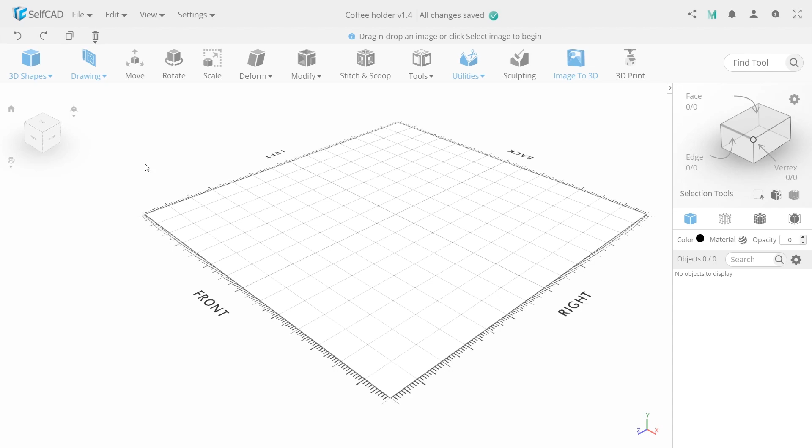Let's switch to top view and orthographic projection like this, so our workspace will look like a canvas that is perfect for drawing. Choose a freehand tool with a circle sketch to draw the round part of our future object. It will also need a hole for a cup.

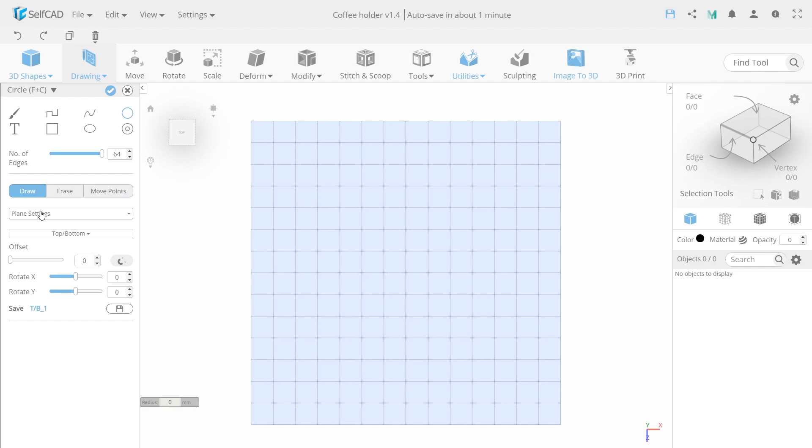Set 64 number of edges to make the object smoother. Also set a minimum step size in the precision settings so our cursor will be glued to the grid. Put a dot in the center, press tab button and set 45 to bottom radius value.

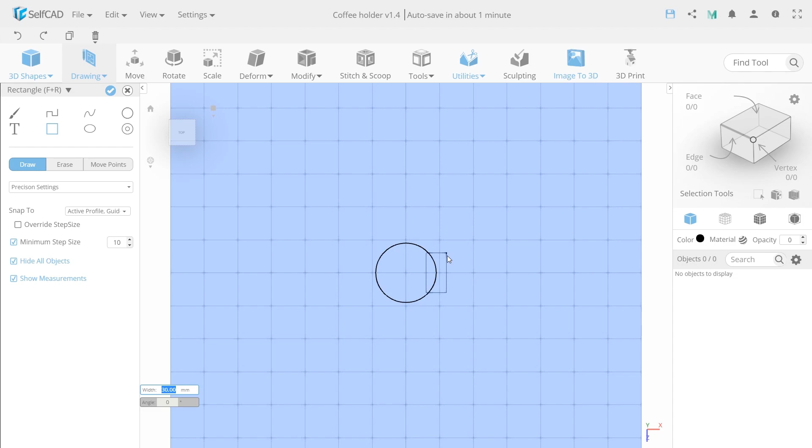Now choose a rectangular brush and put a dot here. Move on 60 down. Now move to the right and set 90 to width. Then I will put a dot here and here, setting 20.

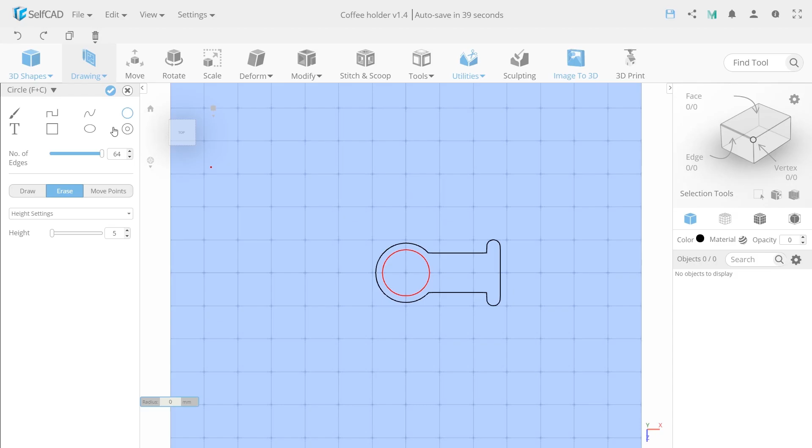I want it to look better, so I'm going to choose a circle brush again and draw two circles here. To create a hole, I will use an erase step that will delete everything we draw. So put the dot in the center and set 35 as a radius. Then set 5 in height settings. Turn back to perspective projection, and that's our result.

Next we need to make a plane in the bottom part. We have two parts, one with a hole and another one filled. So we will create a copy using the copy offsets tool. Now our first created object is unselected and we can hide it.

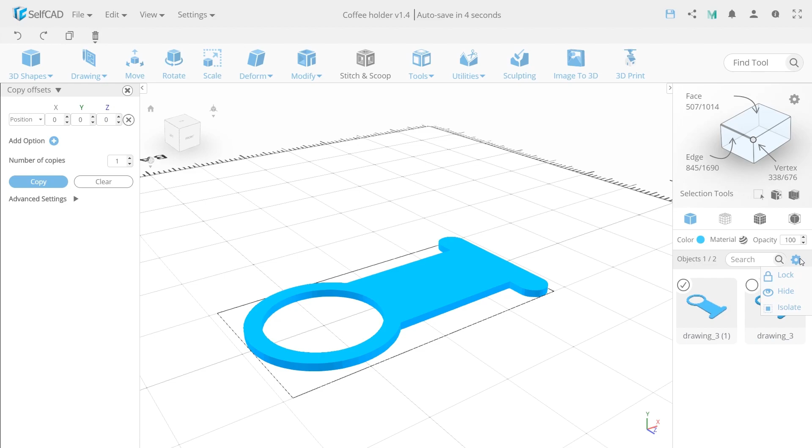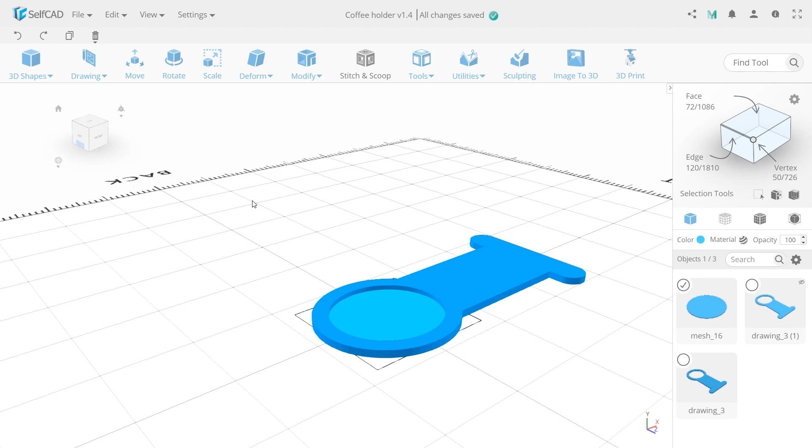To add a plane, choose a cylinder shape and switch off Hide All Objects settings. I will set both radiuses to 40 and height to 2. Now merge the cylindrical part and the bottom base to make one object.

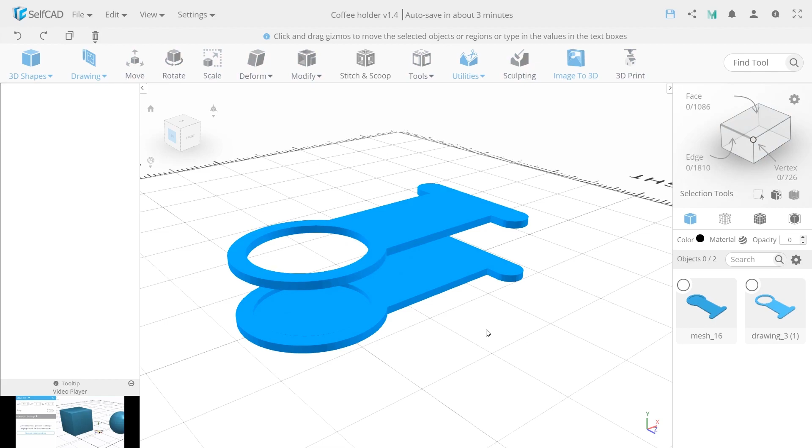Now I'm going to show our hidden object and unselect the second one. Choosing another one, I will move it on 39 on Y, and that's our result. One object is a little higher than another one, and next we will create a fastening.

It will hold the spring in our model. Change the top view and orthographic projection again, and with help of freehand tool I will create this shape. Quick apply.

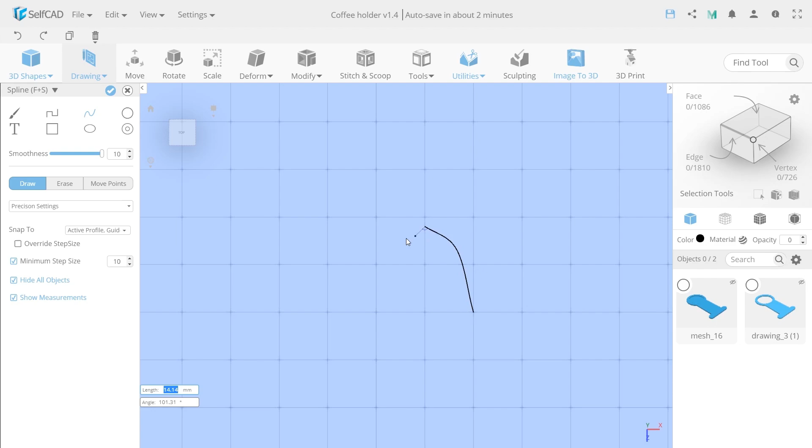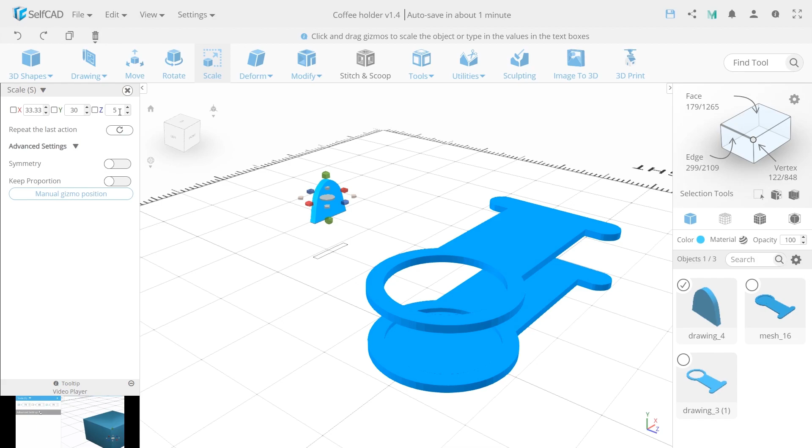Now turn back to perspective projection and rotate on -90 on X and scale with keep proportion option on. I will also reduce the height to 30 and switch off the keep proportion option. I will set 5 on Z and move it here.

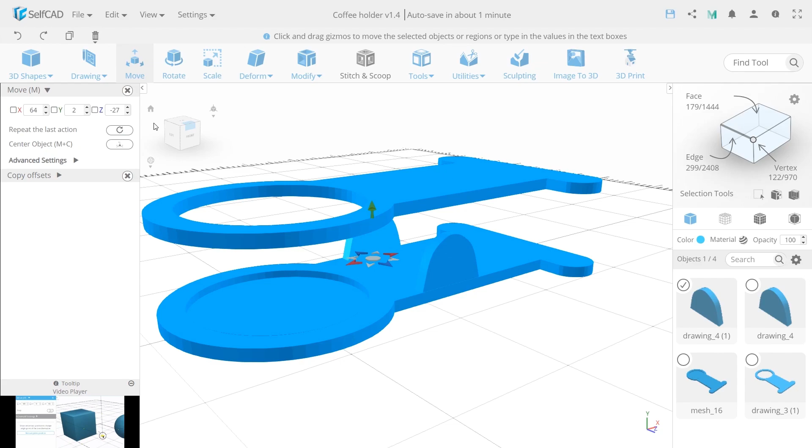Using scale, reach such a form. I will make a copy of it, and to place it on the opposite side, I will invert Z values, -27 in my case. Then I will copy both objects and rotate on 180 on X-axis. Then move it up. Now I will move each one 5 lower on Z.

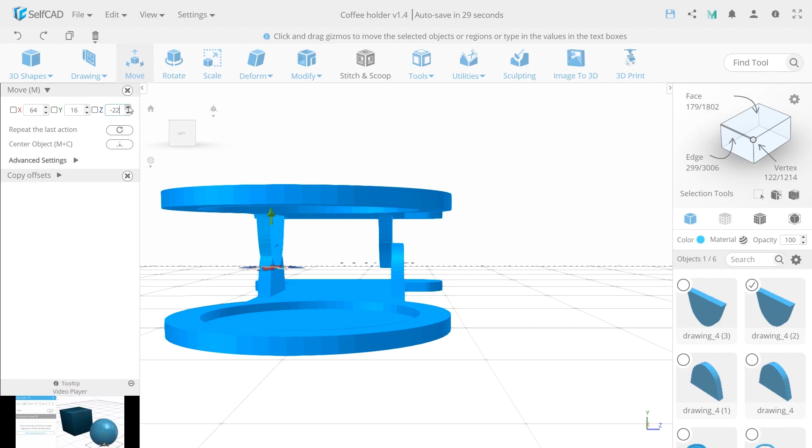We will also need to create holes where the stick will be placed. Make a cylinder shape with 2 as both radiuses and 66 as height. These measures are a little bit bigger than real ones.

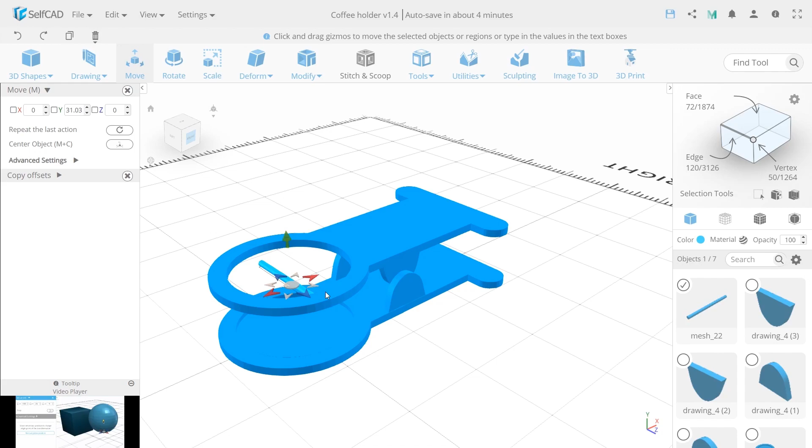Rotate on 90 on X and place here. Placement is important if we want a holder to move. As we have two similar parts, we need to make two copies of a stick. Because we can't make 4 holes using one stick, as it will be one object afterwards, so select the stick

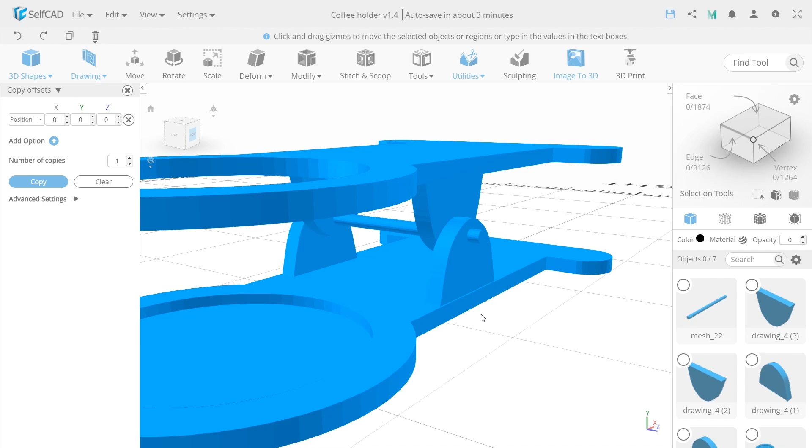and make a copy, then select the needed object. Use Stitch and Scoop with option difference. Let's take a look at our results so far to see how we are going.

Ctrl Z and select other objects, also apply difference. Perfect.

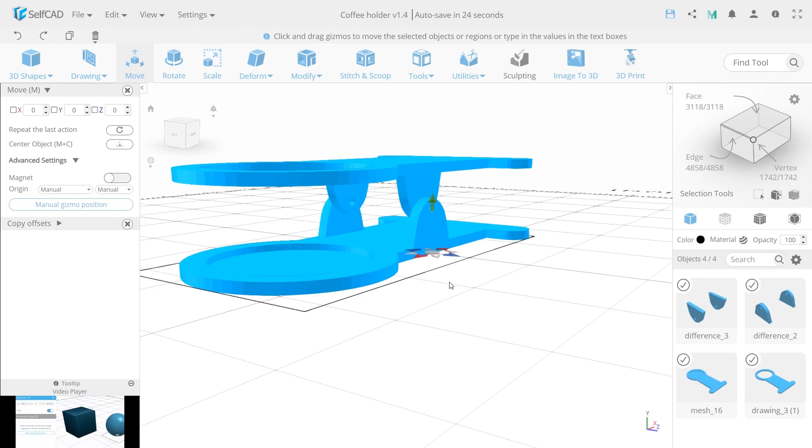Next, select all those parts and move them. To put everything in the right position, you can switch on manual gizmo position in advanced settings. Now put the gizmo here, so pivot is counting from here now. That means we can apply center object option and get this needed result.

Now, when you unselect the object, don't click on the center object because it will be counted from the new dot now. And now we can move to 0 coordinates on Z, like this.

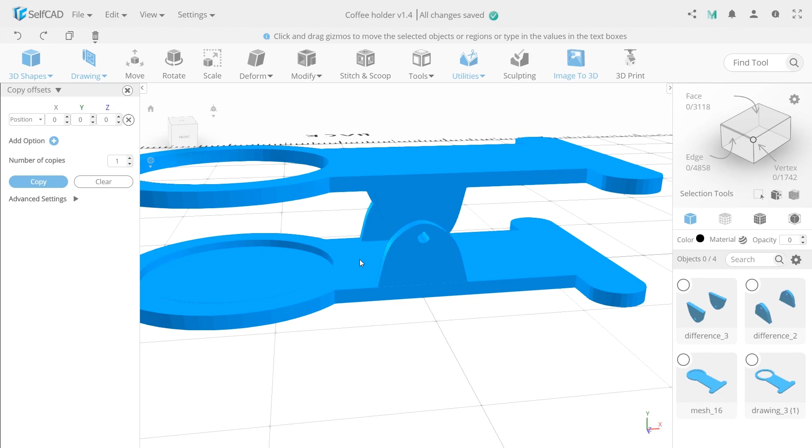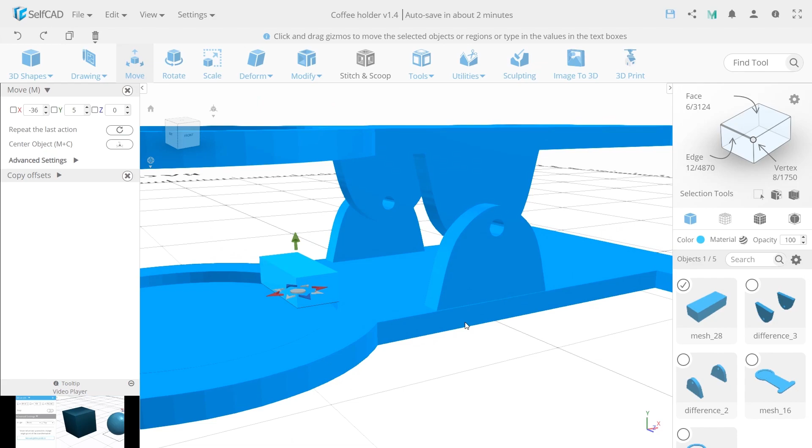Next, we need to create a fastening for this spring. For this, create a cube with height value 7, width 10 and depth 25. Move on 5 on Y and minus 36 on X, so our spring will hold here. This part shouldn't protrude on this hole, so we need to move it right here.

We need to create two such things so they can hold the spring. I will use a cube with 80 as depth, and I will move here and up and make a copy.

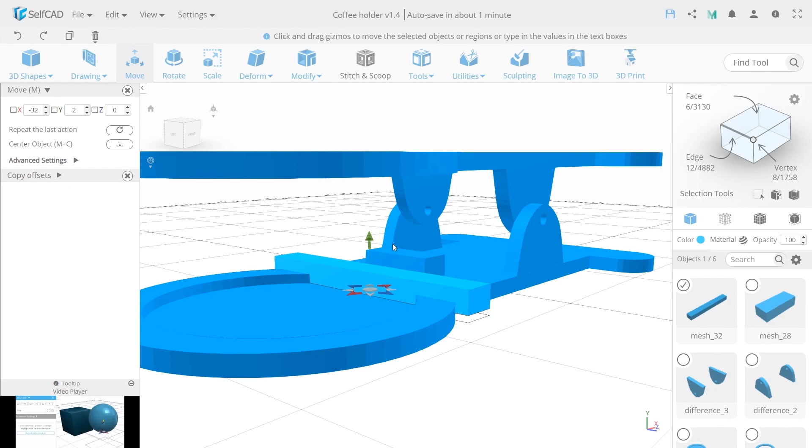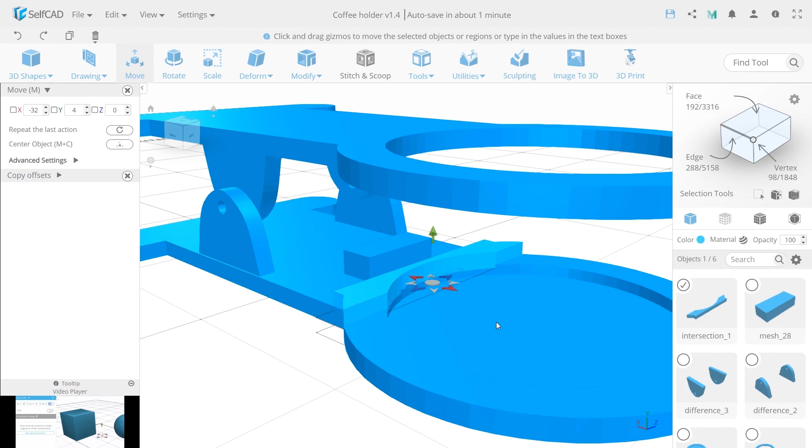After that, I will use stitch and scoop with the intersection on this object and move. Intersection means the central part of the object that are crossed, so we can get this cool shape. Using copy offsets, we can move it up, and we can customize the object a little to make it look better.

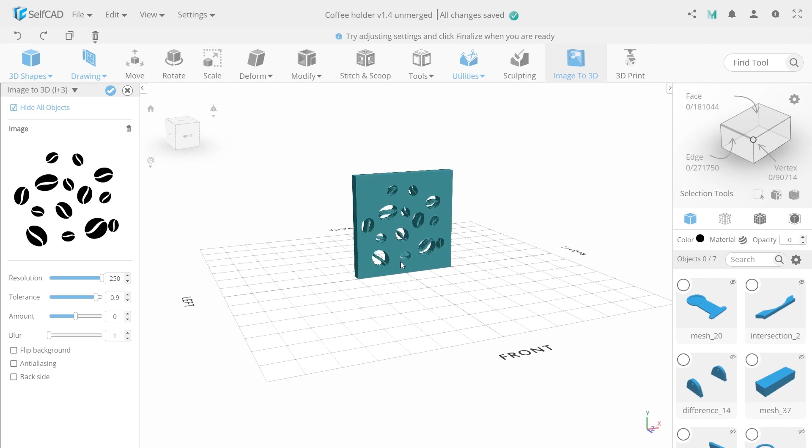Speaking of which, I want to add a nice pattern on the holder top. Let's use the Image to 3D tool. I picked a coffee seed pattern. Use Flip Background button to invert the cut if it doesn't look right. You can also check anti-aliasing to make it smoother.

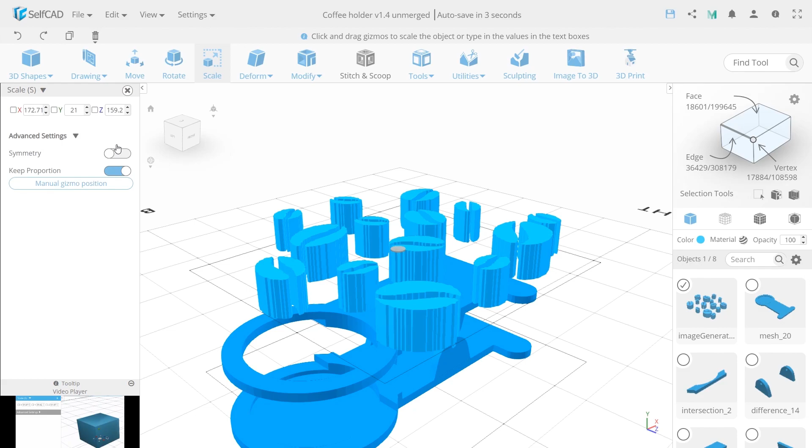That's it. Now let's rotate it on 90 degrees on X-axis and make it smaller with Keep Proportion option on. Set 5 to Y and move it to the place on a handle.

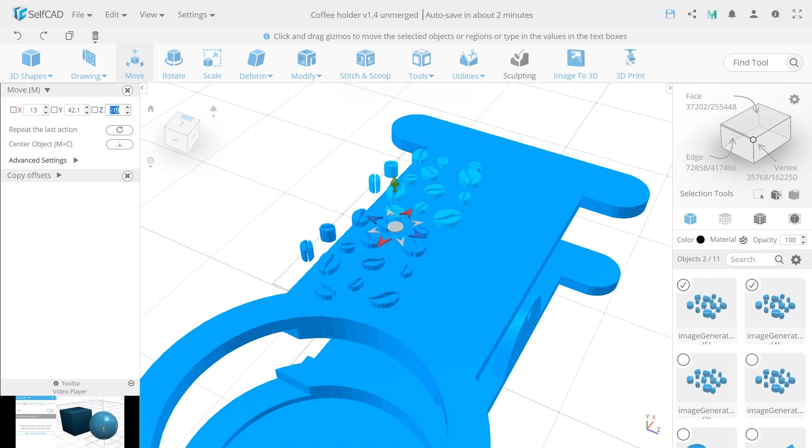Using copy offsets, I will place a model a little more to the right. I will set 40 to X, and now let's move it more to the center and make a copy with 0 value in position settings. Also, move it on 19 on Z and rotate on 180.

And now we need to remove unneeded coffee seeds. Choose the seed and merge them, then copy the result. Now make it a little bigger.

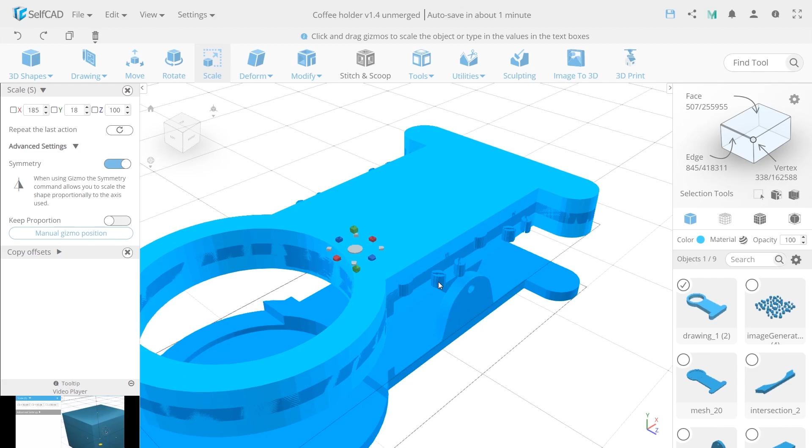Use stitch and scoop with intersection object. Use the scale tool to make it look more flat.

Last thing I want to create is a SelfCAD logo. Let's use Image to 3D tool and appropriate values.

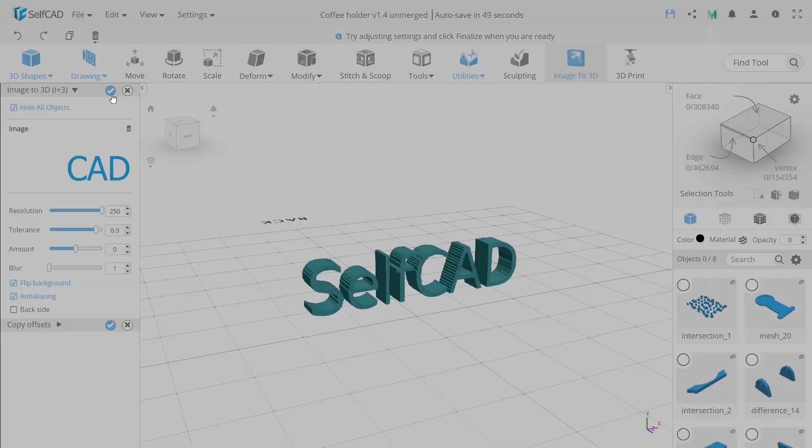And now rotate it by minus 90 degrees on Y and Z axis. Lower Z to 70, keeping the proportions. Now go to Move tool and choose the magnet, then place it here. Switch off the magnet and move it.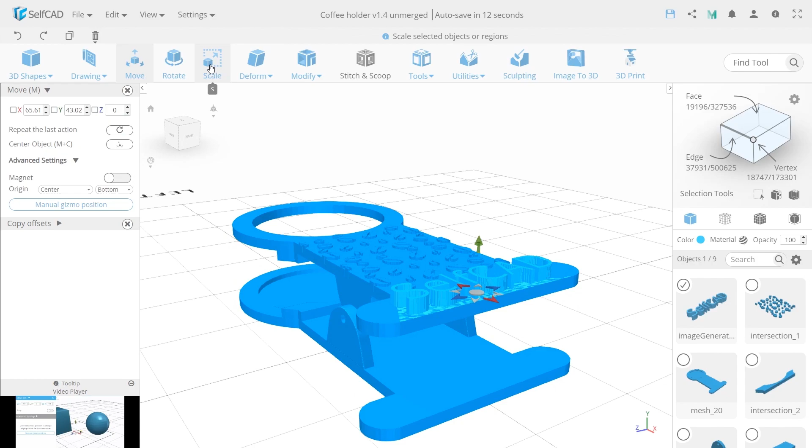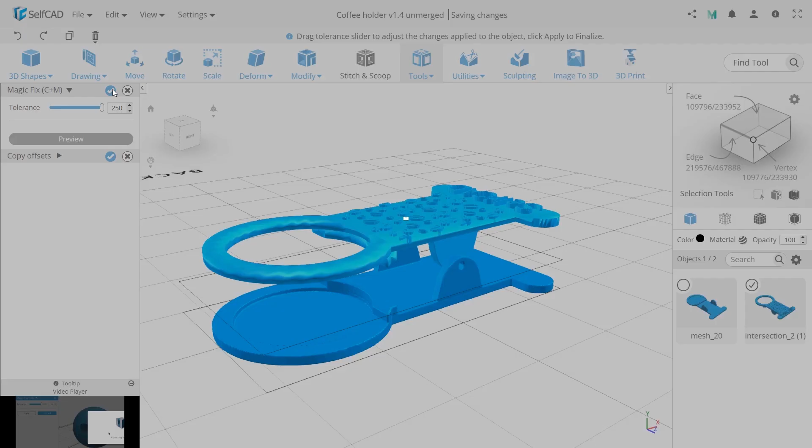Now we need to prepare our 3D model for the print. All we need to do now is divide our model into parts, and then use Merge Objects to make a solid object. You also need to apply the Magic Fix with 250 value to fix the grid before printing. It's also better to rename them.

And we have an amazing ready-to-print coffee cup holder.